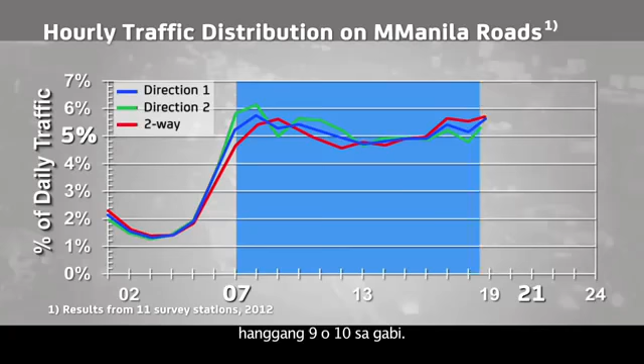As of 2012, people in Metro Manila make 12.8 million trips a day. Private vehicles occupy a big portion of the roads, but it is the public vehicles that carry more people on scarce road space. The impact of congestion is staggering, not just in terms of travel cost, presently at 2.4 billion pesos a day. But traffic congestion also has a big negative effect on air quality. By the year 2030, these impacts are projected to increase.

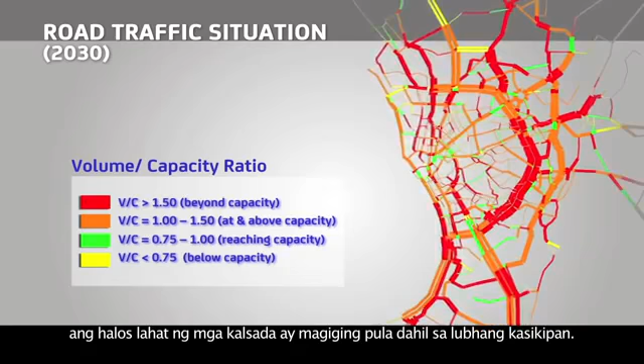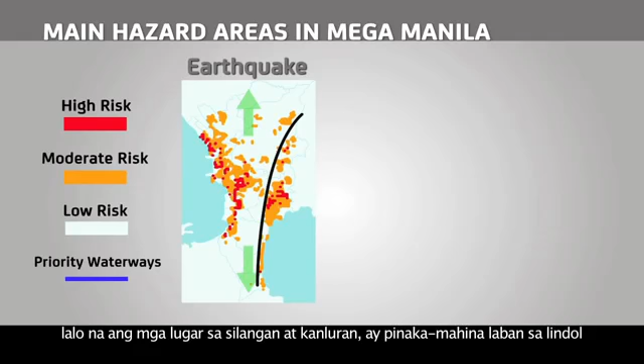This computer simulation of road capacities indicates that almost all roads would be on the red, or capacities would have been exceeded further if nothing is done. Now, take a look at Manila's environmental problem. Metro Manila is vulnerable to natural hazards. As shown here, much of Manila, particularly the east and west areas, is most vulnerable to earthquakes, floods, and landslides. The north and south areas on the axis, however, are low hazard risk areas.

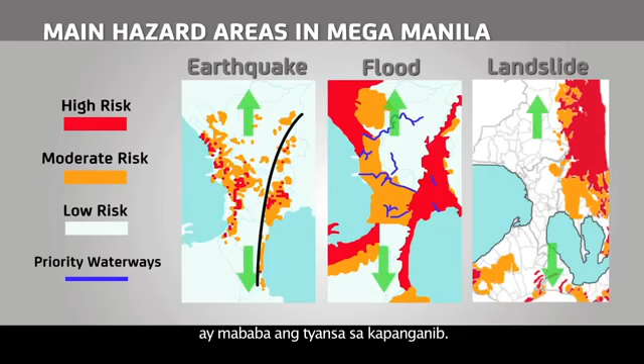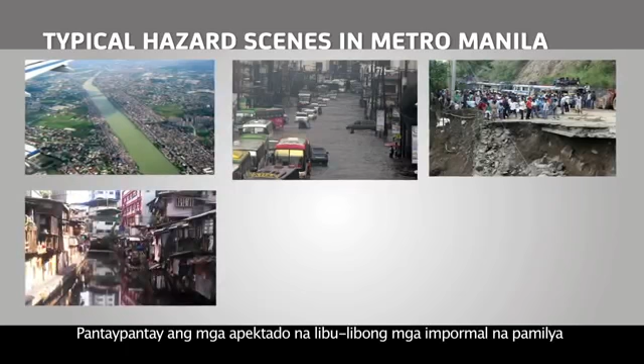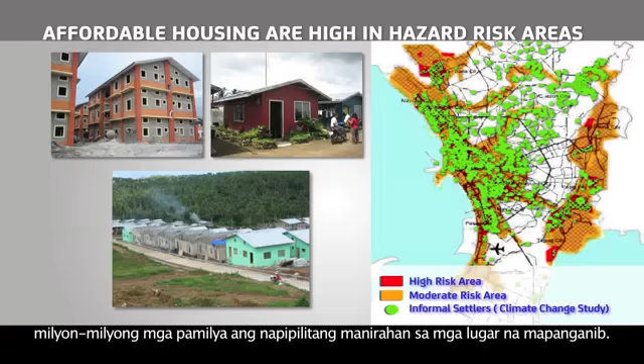Environmental hazards affect millions in Metro Manila and also the Greater Capital Region as a whole. Equally affected are the tens of thousands of informal settler families located in waterways and right-of-ways. Now, let's look at the third major problem. A lack of affordable homes and also poverty force millions of families to live in high and moderate risk areas. There is a great need for affordable housing as we are behind in providing resettling and upgrading to make Filipino homes safer to live in.

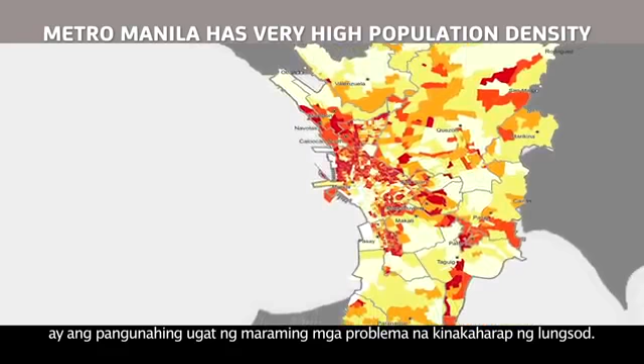The increasing pressure of population growth within Manila is the fundamental cause of many problems the city is facing. And urban expansion is spreading to its surrounding areas as in Bulacan, Rizal, Laguna, and Cavite. Without a present solution, these problems will worsen as the population of Mega Manila steadily increases from 23 million to 30 million by the year 2030.

To make way for a sustainable development of Metro Manila, three core strategies are proposed. The first is to work out transport, land use, and environmental sector solutions in synergy. The next is to manage urban growth effectively. The third is to strengthen and coordinate actions among LGUs and regions. How can Mega Manila cope?

Introducing the Dream Plan, a doable, long-term integrated transport infrastructure development for Mega Manila. The Dream Plan focuses on using transport as a catalyst for sustainable development. It aims to put an end to traffic congestion, households situated in high-risk areas, mobility barriers on the road, excessive transport costs that burden low-income groups, and air pollution.

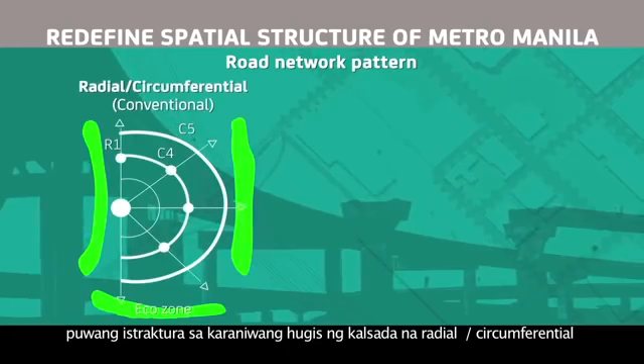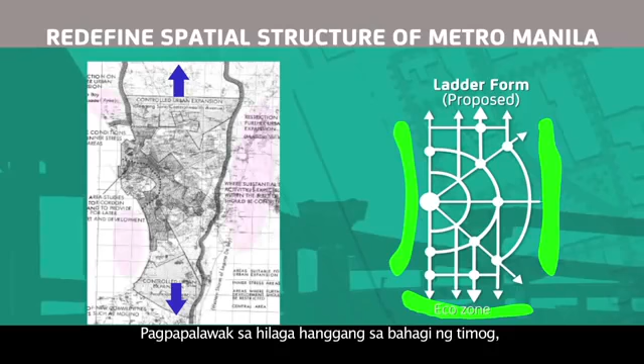The Dream Plan envisions that the Greater Capital Region will be the engine of growth for the country by being a gate to a wellspring of hope, a place for livable communities, and a space for dynamic business centers. The Dream Plan redefines the city's spatial structure, promoting a shift from a radial circumferential pattern to a ladder form. This will guide and support urban expansion on a north to south orientation, thus avoiding high-risk areas.

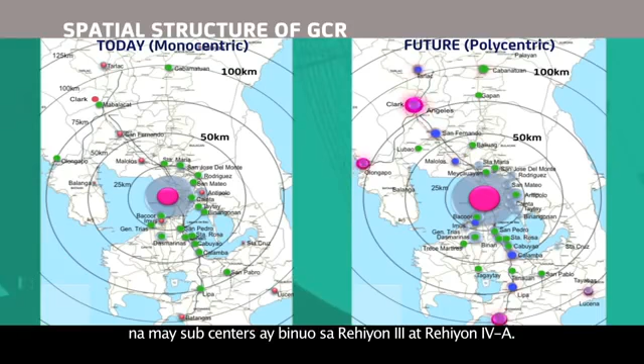The Dream Plan also shifts away from a monocentric development strategy where Manila is the central hub, to a polycentric strategy where suburban areas with sub-centers will be developed in Region 3 and Region 4A. Then, Metro Manila, Region 3 and Region 4A will be better connected. GCR is broadly classified into 5 socio-economic clusters. Metro Manila.

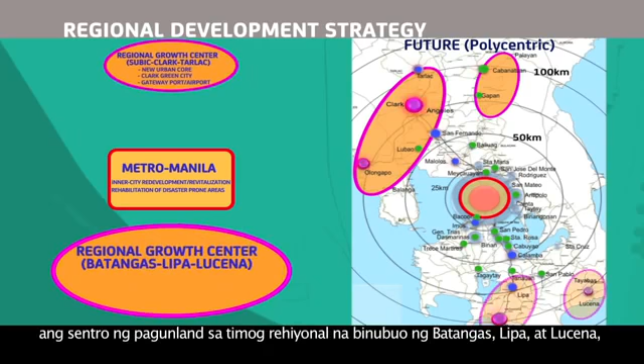The North Regional Growth Center comprising Clark, Subic, and Tarlac, which will form the new urban core with the development of Clark Green City and Gateway Port and Airport. The South Regional Growth Center comprising Batangas, Lipa, and Lucena, which will also be a new urban core in the south with the Gateway Port.

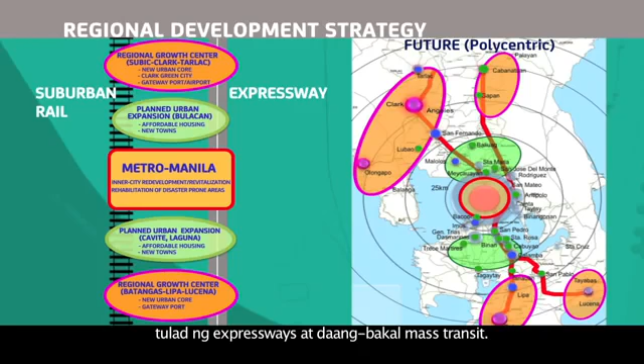And the provinces surrounding Metro Manila, including Bulacan, Cavite, and Laguna, which will host new towns. The 5 clusters will be connected with competitive transport backbone, such as expressways and mass transit rails. Bulacan, Cavite, and Laguna will accommodate informal settler families from high-risk areas and those in need of affordable housing in the new urban areas to be built.

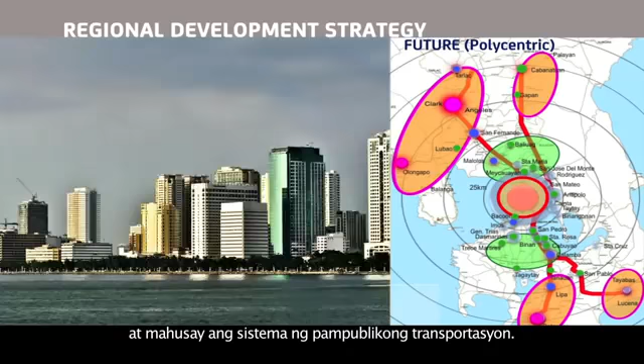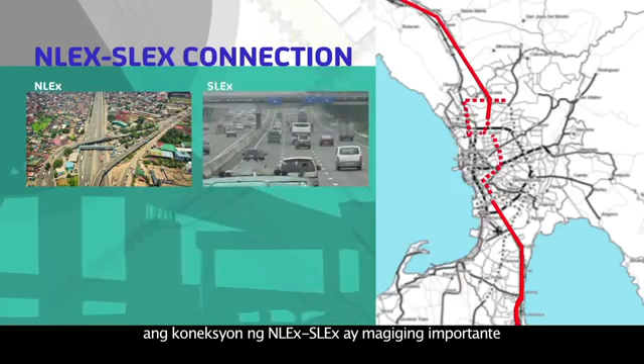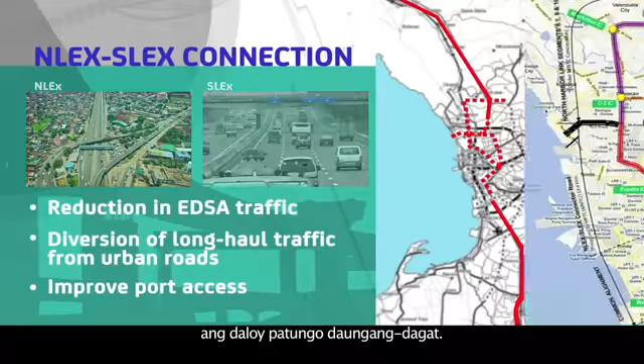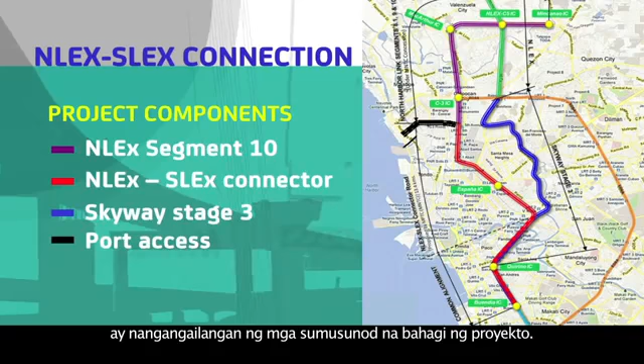When it comes to the expressways, the NLEX-SLEX connection will play a major role and is urgently needed to reduce congestion on EDSA, divert long-haul traffic from urban roads, and improve port access. This expressway connector includes the following project components. Together with other expressways, the expressway network will further attract urban and intercity traffic away from congested at-grade roads. These expressways are developed with users who are willing to pay for congestion-free service.

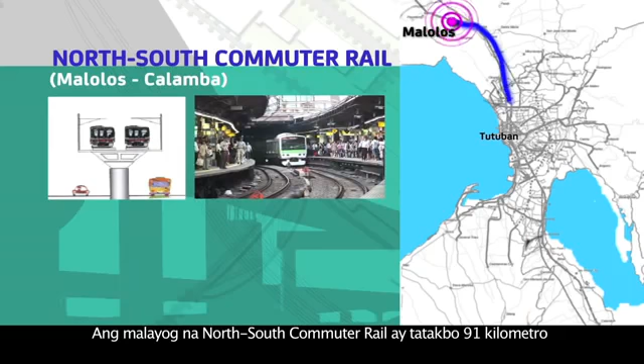Another important transport intervention is the high-quality and high-capacity suburban rail systems. These are the North-South Commuter Rail and the Mega Manila Subway. The suburban rails will strengthen the connectivity between Manila and its neighboring regions, while serving as the guiding path for developing new urban centers and residential zones, where people are provided with affordable housing and better living environment and commuting services.

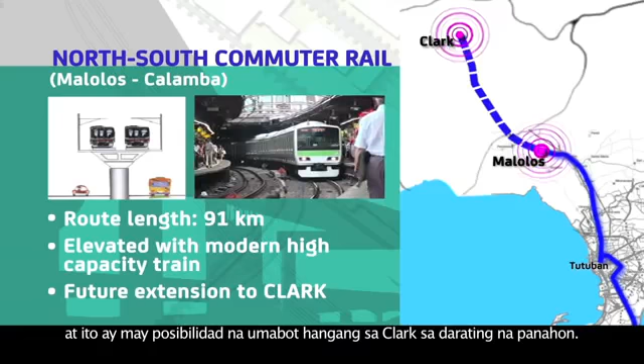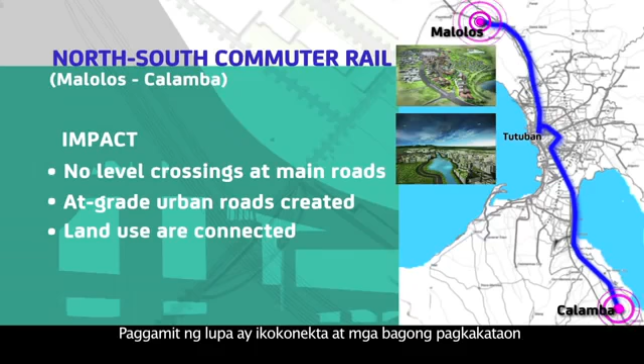The elevated North-South Commuter Rail will stretch 91 kilometers from Malolos to Calamba, using the PNR right-of-way, and will open up to a future extension to Clark. The North-South Commuter Rail will have no level crossings at main roads, thus allowing the creation of at-grade urban roads. Land use will be connected and new development opportunities will emerge at and around stations.

The Mega Manila Subway will be built to stretch from San Jose del Monte to Dasmariñas in rapidly developing areas. The new subway will dramatically improve mobility and accessibility along EDSA and other roads, and promote north-south urban growth and new land development.

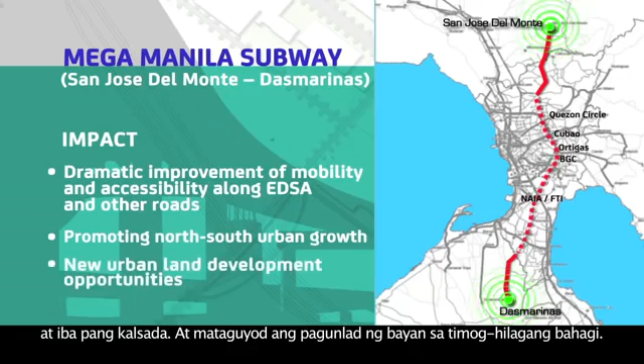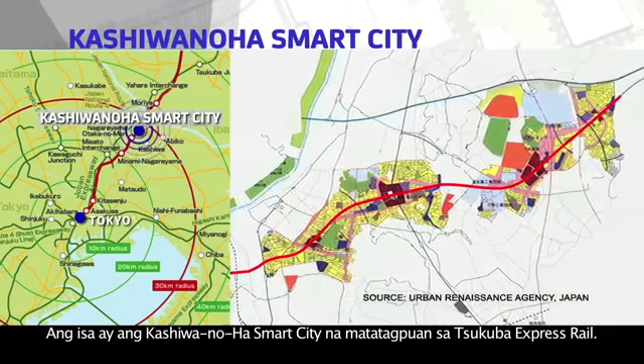When it comes to integrating suburban rails and development of new towns, Japan has a lot of experience we can learn from. One is the Kashiwanoha Smart City along the Tsukuba Express Rail. Another is the Tokyu Tama Denentoshi along the Tokyu Denentoshi line. Both new towns and suburban rail were developed by private sector alone.

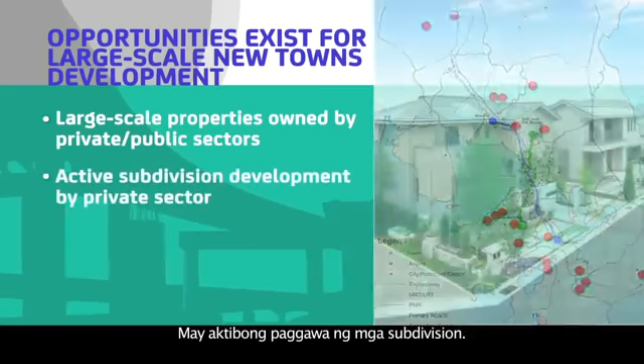Do opportunities for a large-scale new town development exist for Mega Manila? The answer is yes. The public and private sectors own large properties on the north and south axis of GCR. There is active development of subdivisions. The law also provides that 20% of total project cost or area be allocated for low-cost housing.

The Dream Plan will use the public-private partnership model, where the government will develop the North-South Commuter Rail and access roads and provide basic infrastructure and public service, while the private sector will develop affordable housing, commercial, industrial, education, and recreational projects. This can answer the estimated demand of 5 to 10 new towns for 1 to 2 million households.

Part of the Dream Plan is assigning new roles to the existing gateway ports of Manila, Subic, and Batangas, all to maximize capacities and development opportunities. Controlling the future expansion of Manila ports and providing shippers with incentives to use Subic and Batangas ports will aid in distributing and sharing Manila's cargo handling functions to the two other ports.

The Manila port will also be regenerated into high value-added diversified waterfront areas, similar to those in Yokohama and Seattle, and many other ports in the world.

Airports will also be repurposed. Clark and Manila airports will serve as gateway ports for the Greater Capital Region. A new NAIA will be developed in the vicinity of Metro Manila to be as competitive as those of Singapore and Hong Kong.

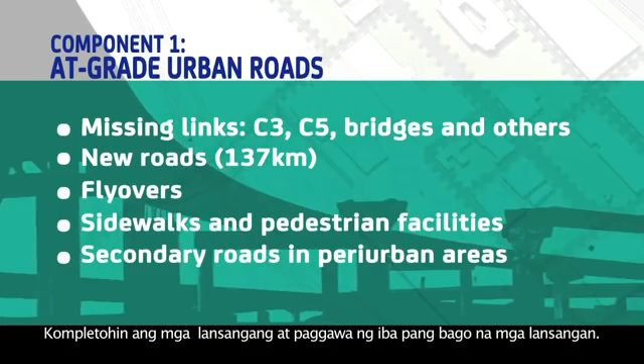The Dream Plan will further include five components specifically for Mega Manila. Construction of missing links of urban roads will be completed, while new ones will also be built. There will also be intercity and urban expressways, integrated physically and in terms of its toll system, operations, and management.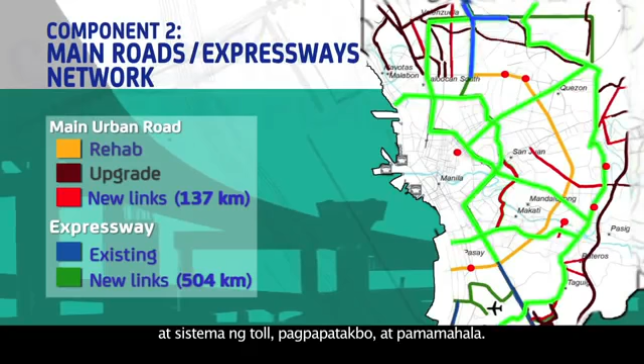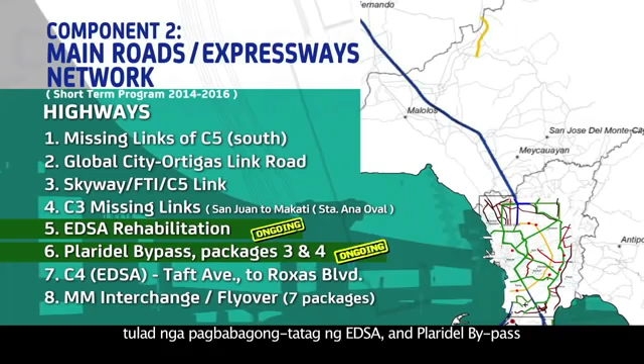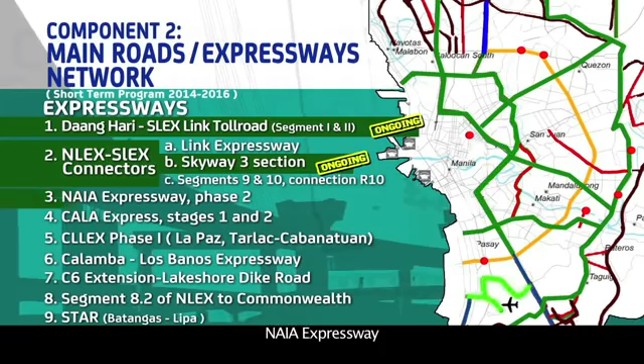Construction and improvement of vital links have commenced, such as the rehabilitation of EDSA, the Plaridel Bypass Road, the Daang Hari SLEX Link, Skyway 3, NAIA Expressway, and Star Expressway, and many more are already in the pipeline.

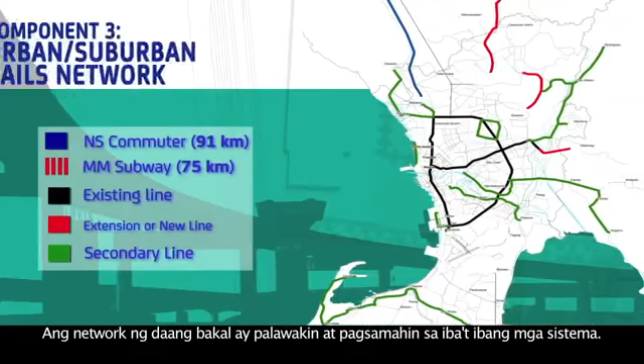Urban and suburban rail networks will be expanded in hierarchy and in integration with different systems. Capacities of existing urban rails are currently being increased. New lines are already in the planning stage.

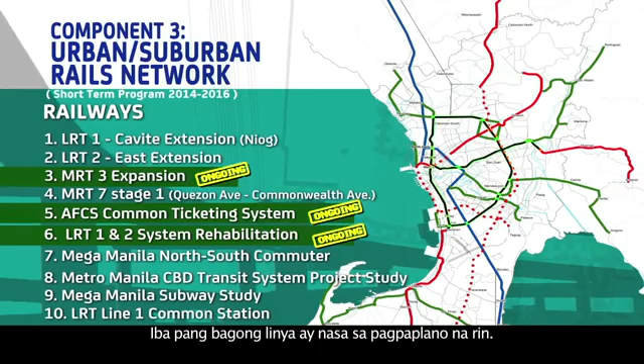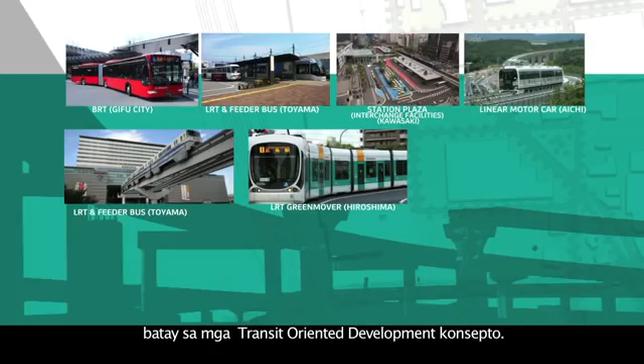The goal of the mass transit rail network is to provide the people with convenient, comfortable services at affordable cost, and promote reorganization of urban areas based on the transit-oriented development, or TOD, concept. Just like in these cities, careful selection of appropriate mass transit systems will also be carried out to introduce a proper system in proper locations.

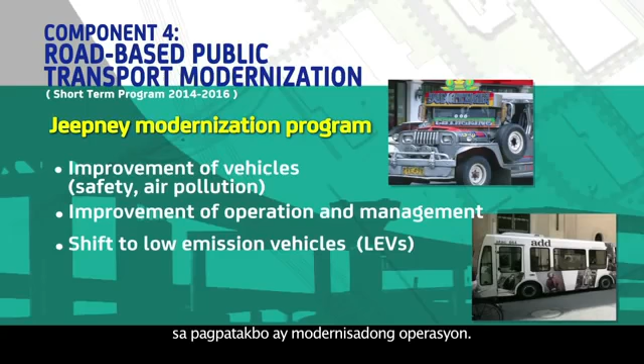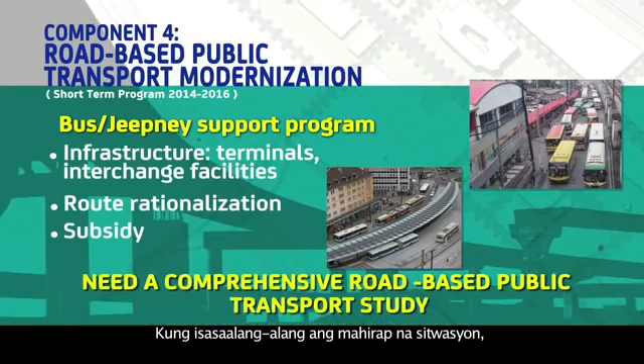There is now integration of the provincial bus services for the southwest routes of Mega Manila. Other areas will also see the same improvement. Buses and jeepneys in the future will still play a major role, so fleets and operations will be modernized. Their routes, terminals, and interchange facilities will also be reorganized. Considering the complex situation, this then calls for a comprehensive, road-based public transport study.

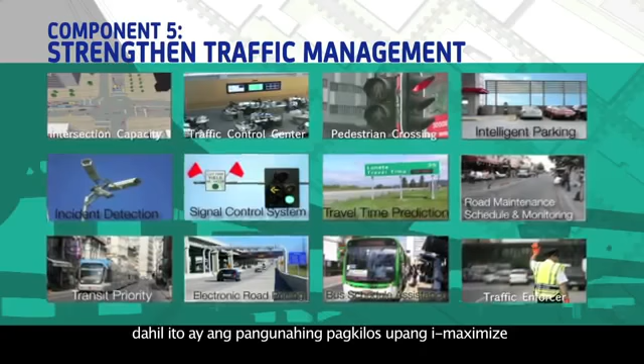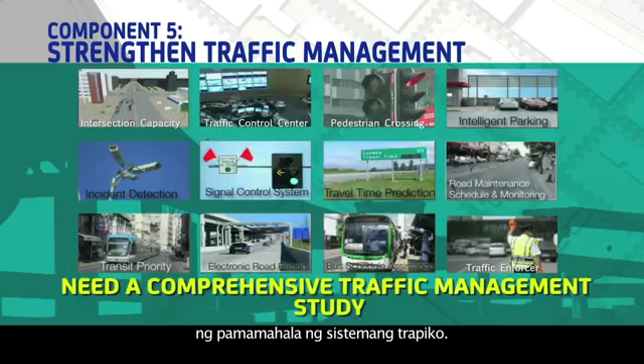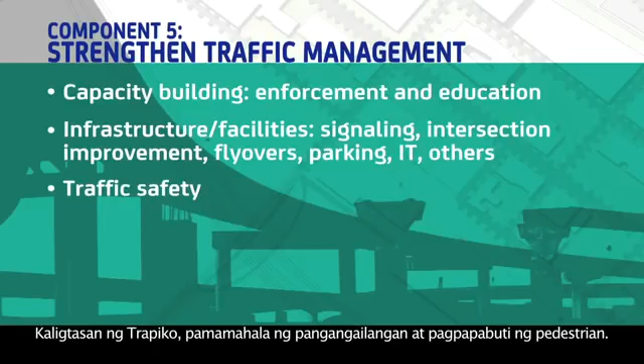On top of these, traffic management will be improved, as it is the fundamental action to maximize the use of available infrastructures. This also requires a comprehensive study to cover the many interactive aspects of traffic management systematically. These include capacity building on traffic enforcement and education, improvement of infrastructure and facilities such as signaling, intersections, flyovers, parking, and others, traffic safety, demand management, and improvement of pedestrian environment.

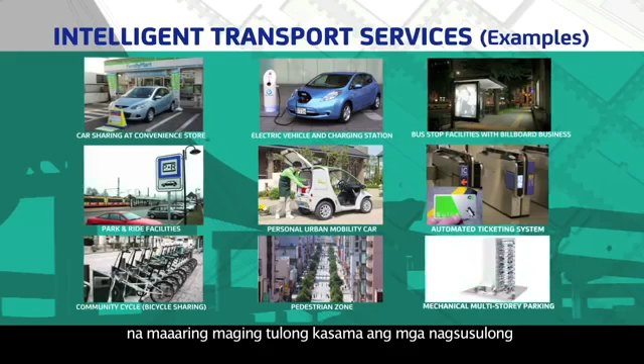Advancements in transport technologies and systems that can be of help include those that promote greater use of public transport, low-emission vehicles, automated and mobile systems, and others.

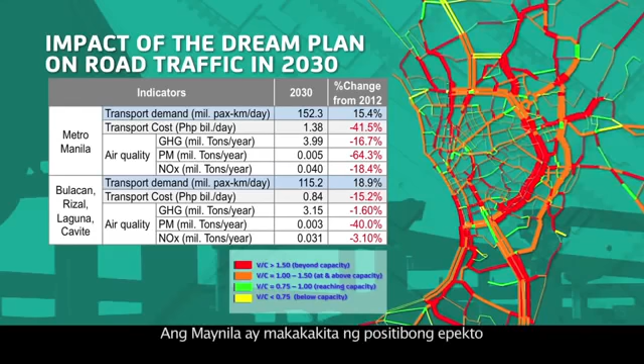Manila will see positive impacts, especially on road traffic, as more roads will be freed up from congestion. Significant impacts outstripping investment costs will be realized economically, financially, socially, and environmentally by the year 2030. Without traffic congestion, people can reach farther areas much faster than today.

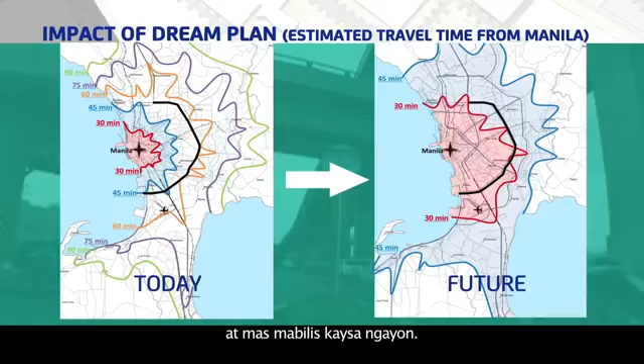We've always had the plans. We've always had the go signal. Now, funding is no object. The estimated budget envelope for transport investments can cover the short-term plans and can be managed for the medium and long-term plans. For example, the total Dream Plan cost of 2.4 trillion is well within the national transport budget envelope of 4.8 trillion pesos. The short-term program of 520 billion is also within that of the 539 billion pesos budget.

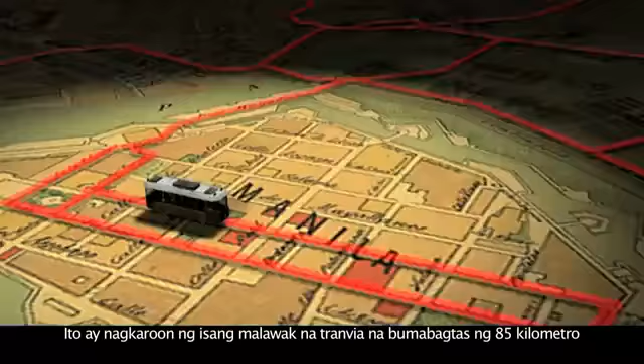Manila was once a well-planned, progressive, mass transit-based region. Its urban area was well laid out for a population of 300,000. It had an extensive tranvia network stretching 85 kilometers, and housing estates were developed in the suburban areas along the tranvia routes. This was purely a private sector initiative.

40% of the travel demand was met by the tranvia and supplemented by a large number of calesas. Pedestrian space was provided and traffic management was also in place. Compact and transit-oriented urban area was then already a reality.

We don't have to look far. Our own history provides a model for a better future. Let's continue pursuing our dream.